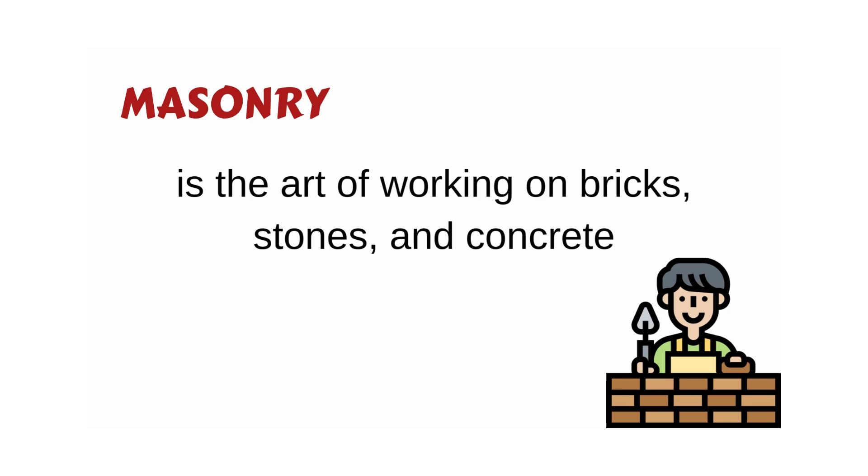So, what is Masonry? Masonry is the art of working on bricks, stones, and concrete. A Mason is a person working on bricks, stones, and concrete - they are the experts in masonry.

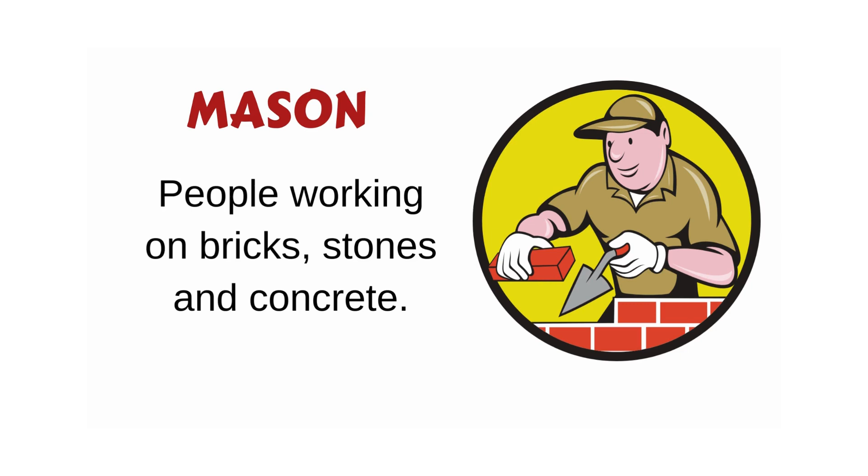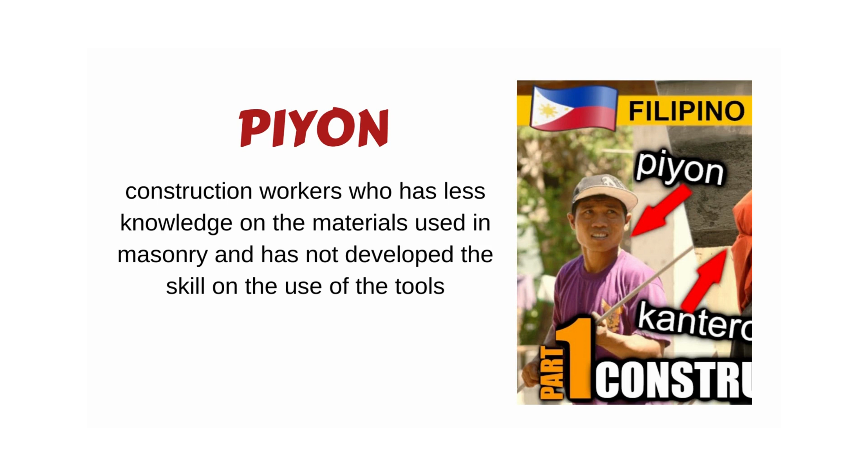Construction workers who have less knowledge on the materials used in masonry and have not developed skill on the use of the tools are the helpers of the mason. They don't have much knowledge about the materials related to masonry, and their skills on the tools aren't developed yet, but they assist the mason. They are called 'piyon'.

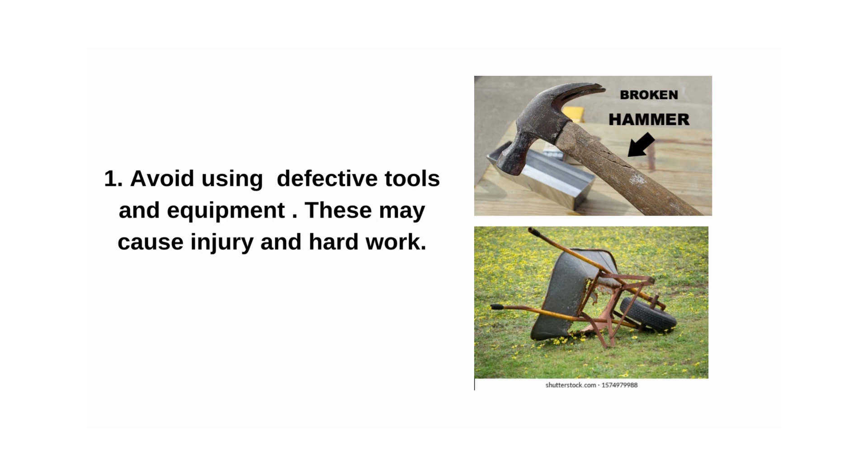Safety practices in masonry - safety first. Number one, avoid using defective tools and equipment; this may cause injury and hard work - those are broken tools. Number two, use the right tools for the kind of work you are doing.

Number four, handle tools, materials, and equipment properly to facilitate work and prevent accidents and serious injuries. It can damage persons and properties.

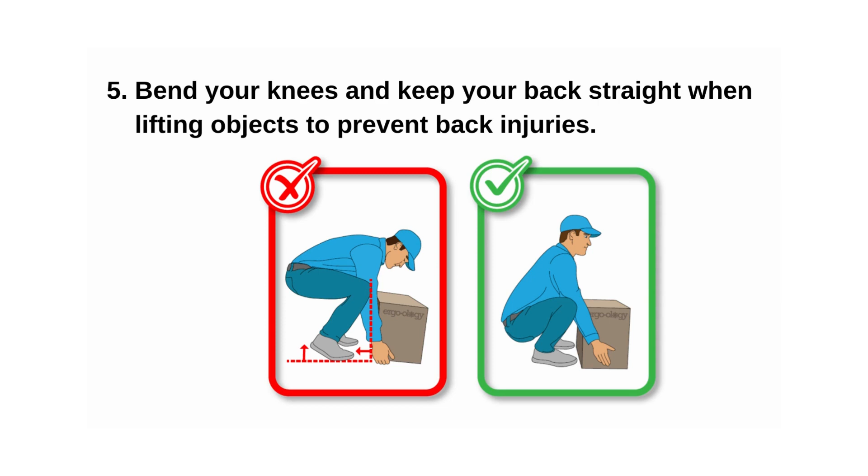Number five, bend your knees and keep your back straight when lifting objects to prevent back injuries. This is the proper way of lifting so you won't get back injuries.

Number seven, always wear safety shoes when working at the job site to avoid stepping on rusty nails and pieces of sharp iron. Injuries from these materials can cause deadly tetanus infection. With safety shoes, you won't get pierced by rusty nails.

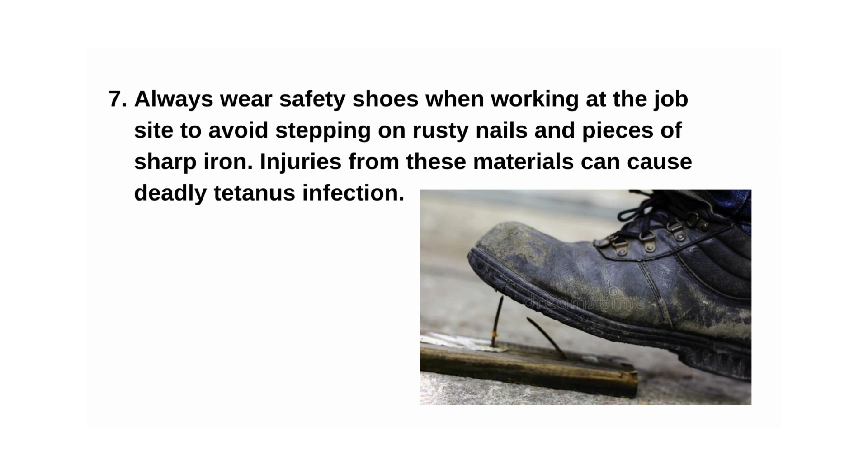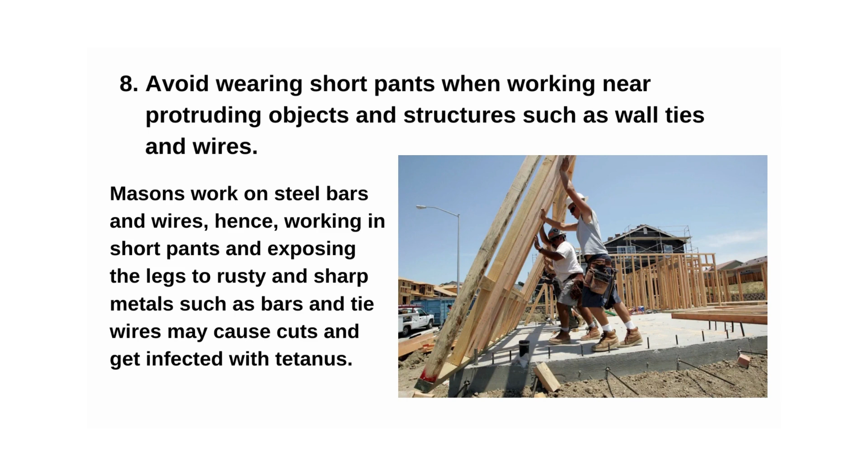Number eight, avoid wearing short pants when working near protruding objects and structures such as wall ties and wires. Masons work on steel bars and wires, so wearing short pants and exposing the legs to rusty and sharp metals like bars and tie wires may cause cuts and tetanus infection. To avoid tetanus, we should not wear shorts like this.

Number nine, provide non-skid safety devices for firm contact with the floor to avoid skidding and prevent serious injuries. When we use a ladder, it needs to have rubber - a safety feet with rubber so you won't slip and fall, preventing serious injury. Attach a rubber foot or pad to prevent skidding.

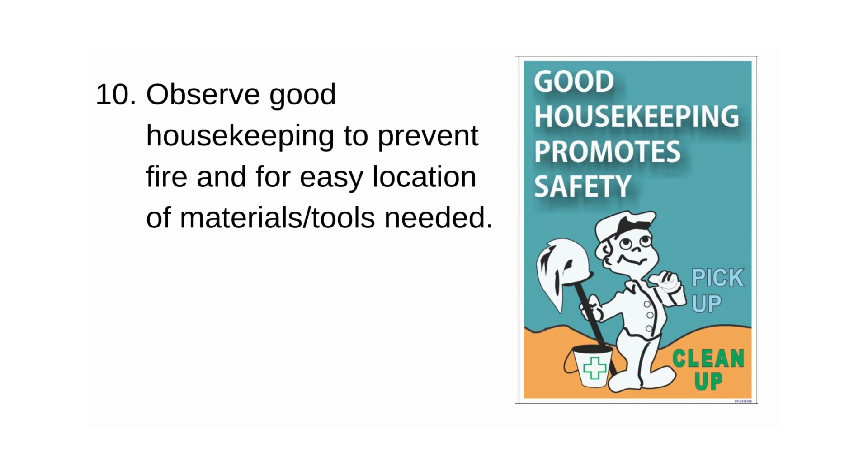Number eleven, avoid smoking while at work, especially if near paints or varnish and other finishing materials to prevent fire, because if there's painting going on and you smoke, it could cause a fire.

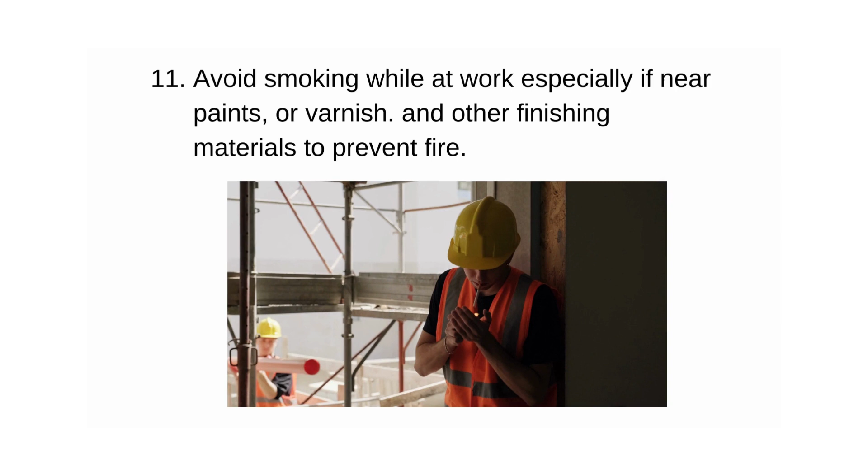Okay, tools and materials used in masonry - what are they? But for now, let's study the tools first. Essential masonry tools include the following.

Brick hammer, used to divide concrete hollow blocks or bricks into halves. This is for splitting, for dividing hollow blocks - it's called a brick hammer.

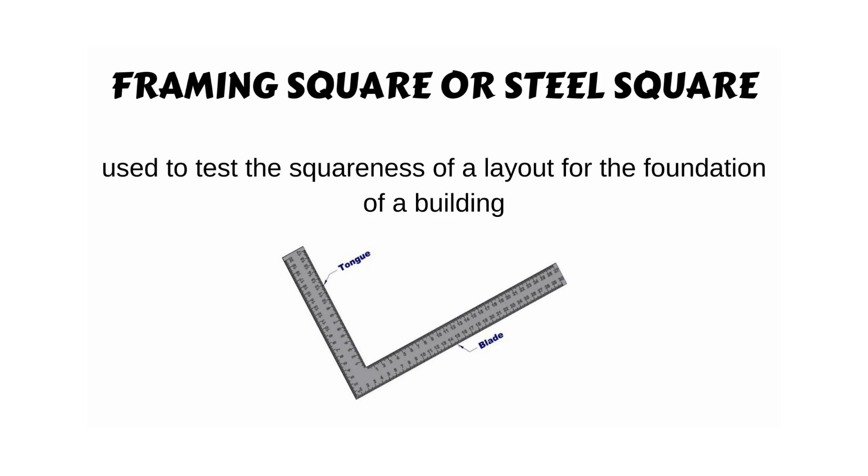Framing square or steel square, used to test the squareness of a layout for the foundation of a building. For corners, so you can see if it's square - the framing square or steel square should be used.

Shovel is pointed and very good for scooping gravel and sand. Spade has a flat face or tip suitable for mixing concrete. The difference between them - one is pointed, the other has a flat face. This one is used for scooping gravel and sand, and this one, the spade, is for mixing.

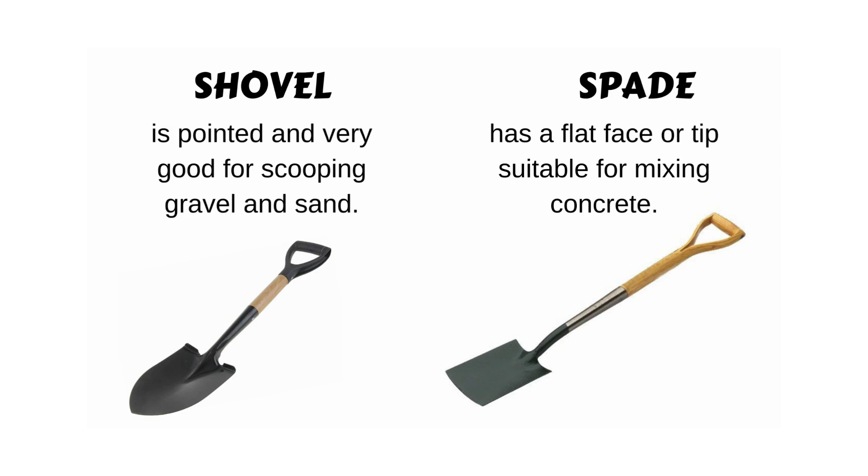Pointed trowel, used to put the concrete mixture on the hollows of concrete hollow blocks or in between layers of CHB. This is for placing the mixtures - you use it to put the concrete mixture between the layers of hollow blocks. The pointed trowel is used for this.

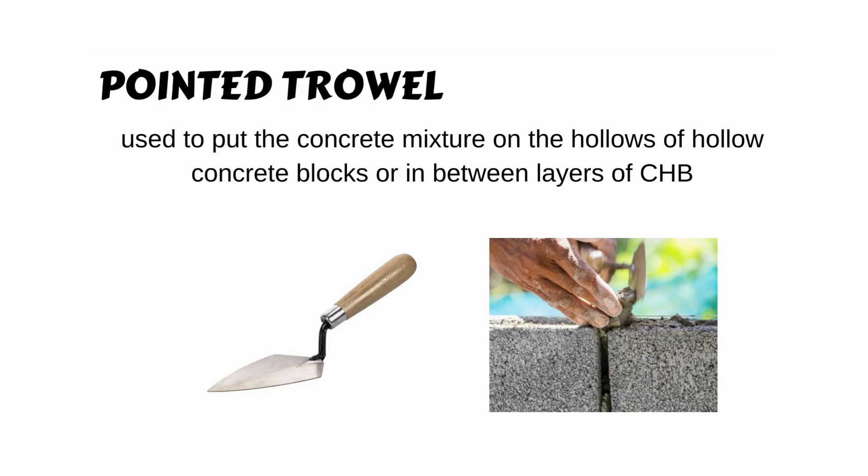Next, spirit level - this is a testing tool that tests the horizontalness and verticalness of a job. To get the horizontalness or verticalness of something, you use the spirit level to make it level.

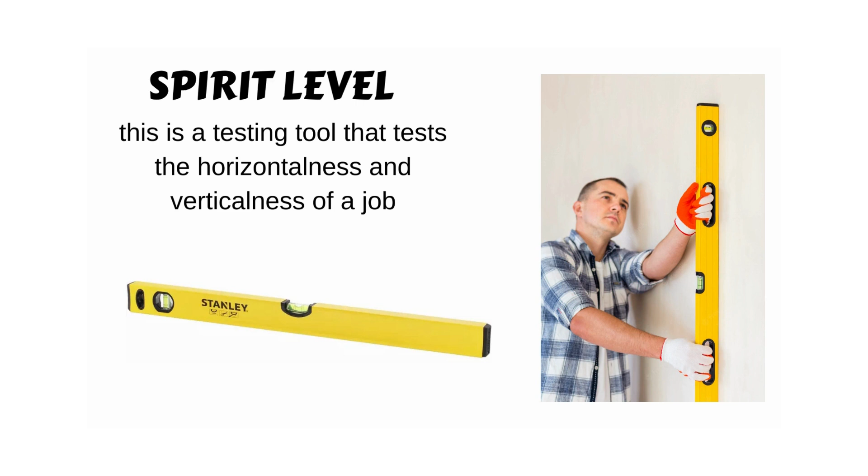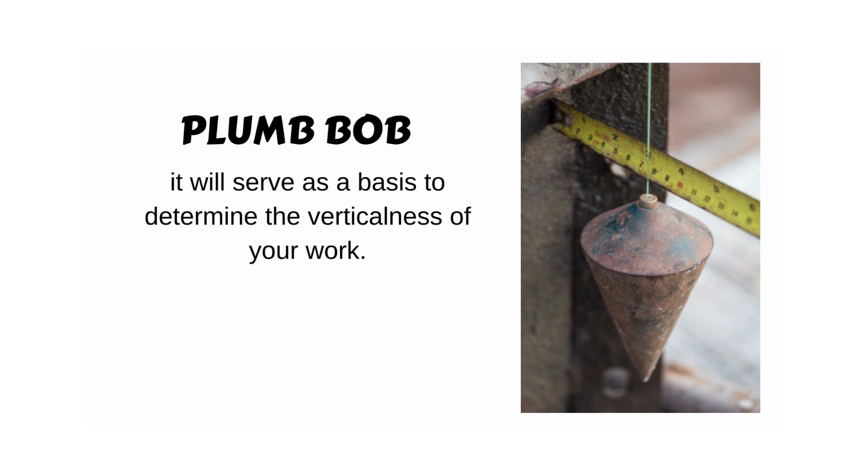Plumb bob - it will serve as a basis to determine the verticalness of your work. So when it comes to verticalness, the plumb bob is what you can use.

Cold chisel, very useful in drilling holes in a concrete surface. If you want to make a hole in concrete, use a cold chisel.

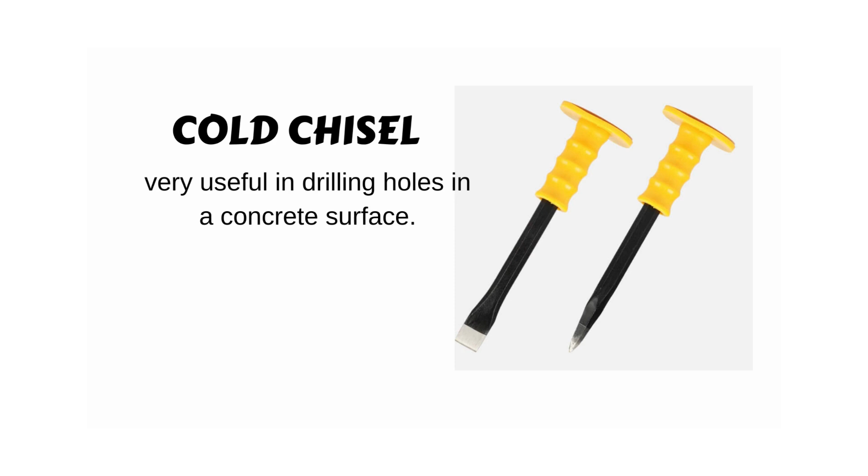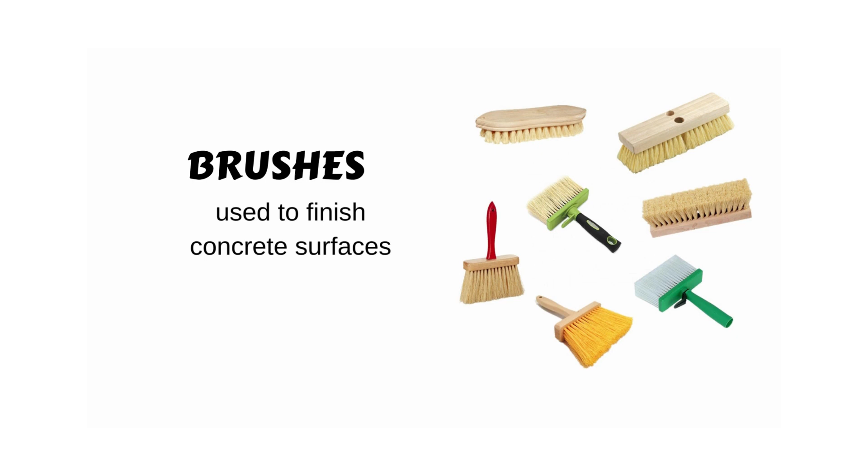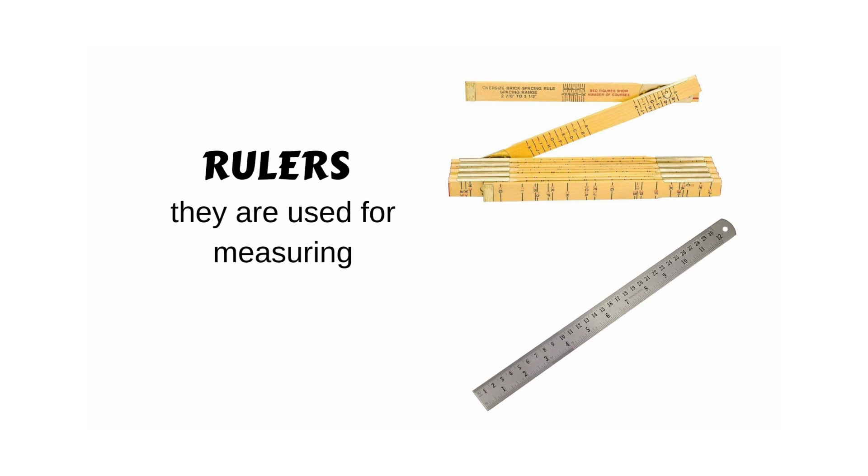Rulers, they are used for measuring. This is the zigzag rule, and this is the steel rule - they are used for measuring.

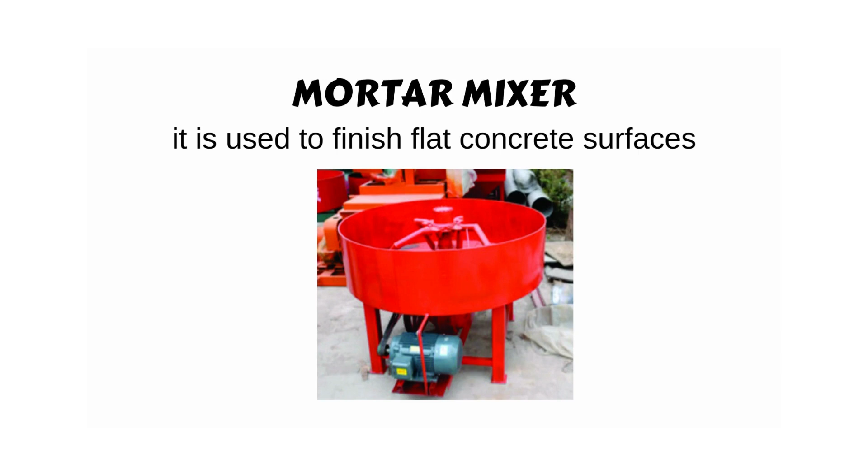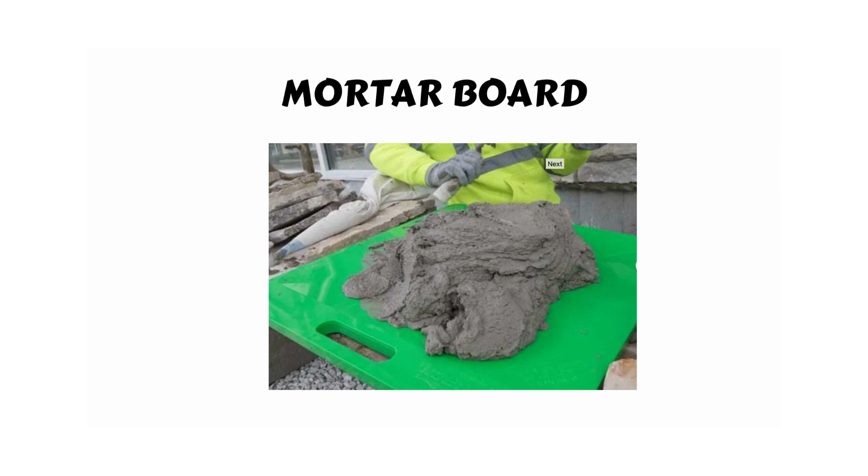Mortar board, parang siyang chopping board. Nilalagay yung mortar mixture. Wheelbarrow is a tool used to transport heavy materials like sand, cement, gravel, and cement mixture from one place to another, para hindi ka mahirapang magbuhat ng heavy materials.

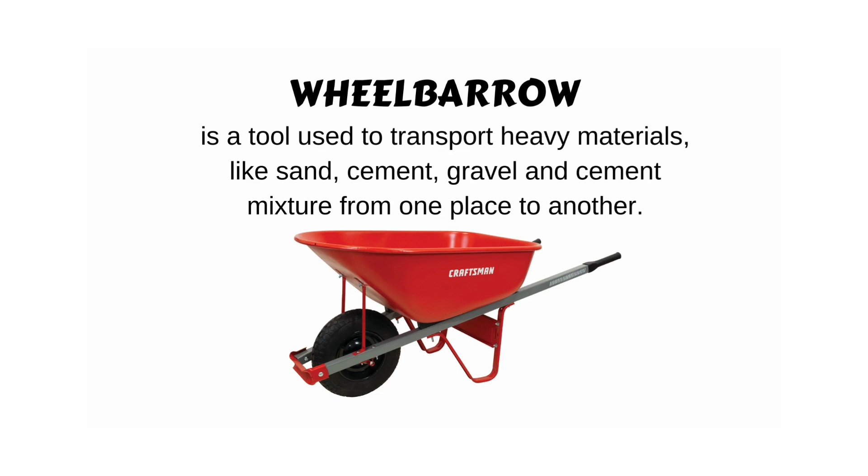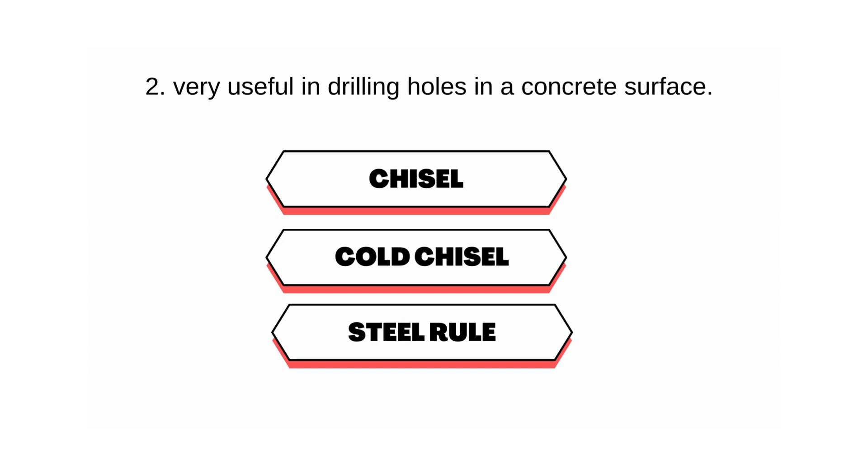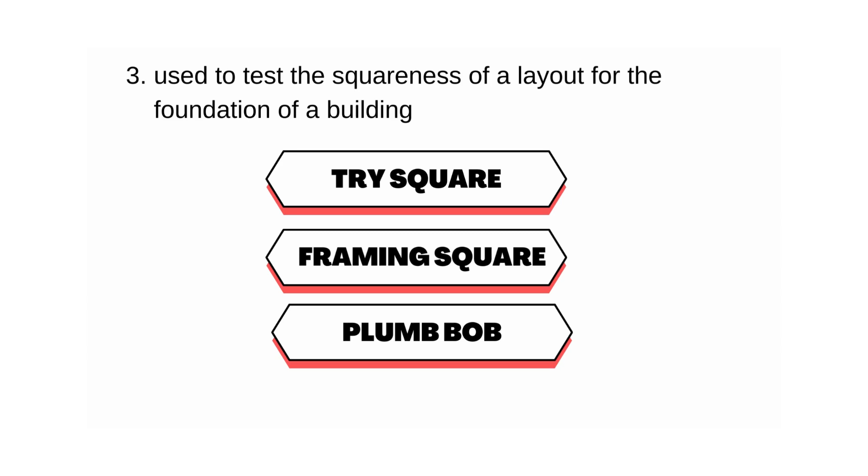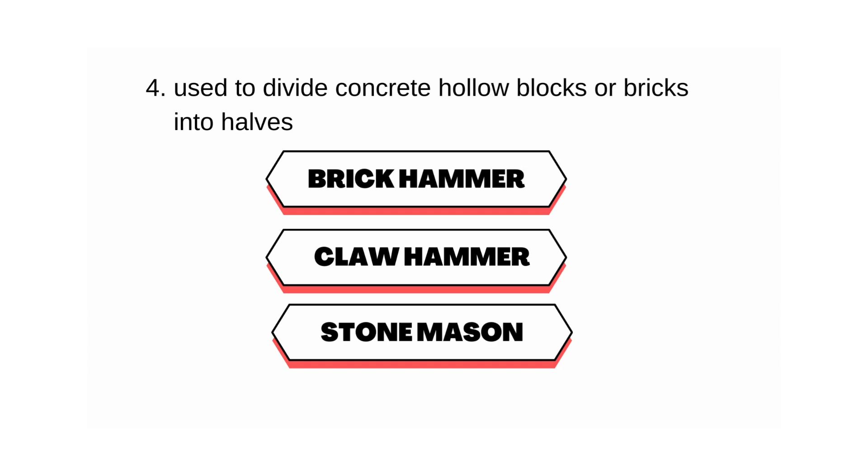Number 5, used to put the concrete mixtures on the hollows of hollow concrete blocks or in between layers of CHB. Wooden trowel, pointed trowel, finishing trowel.

Number 6, it will serve as a basis to determine the verticalness of your work. Framing square, spirit level, plumb bob.

Number 7, is pointed and very good for scooping gravel and sand. Shovel, spade, fork.

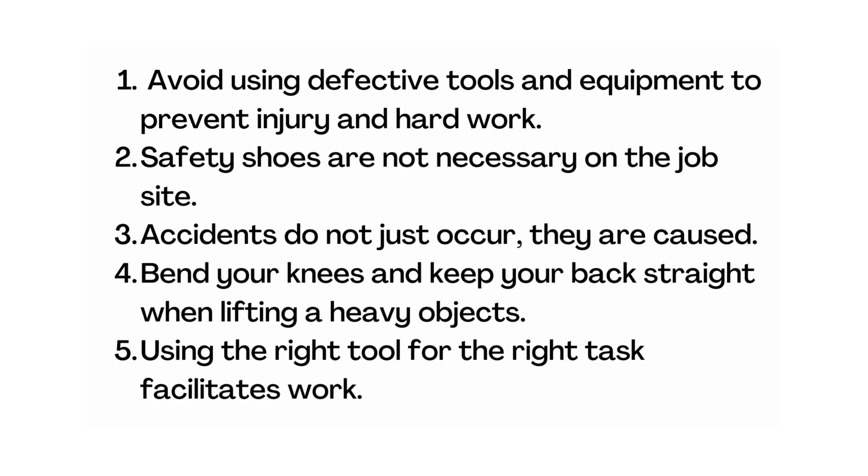Number 6, dull tools produce poor work.

Number 7, avoid horseplay at work.

Number 8, wear short pants when working near protruding objects and structures such as wall ties and wires.

Number 9, observe good housekeeping.

Number 10, smoke while at work.